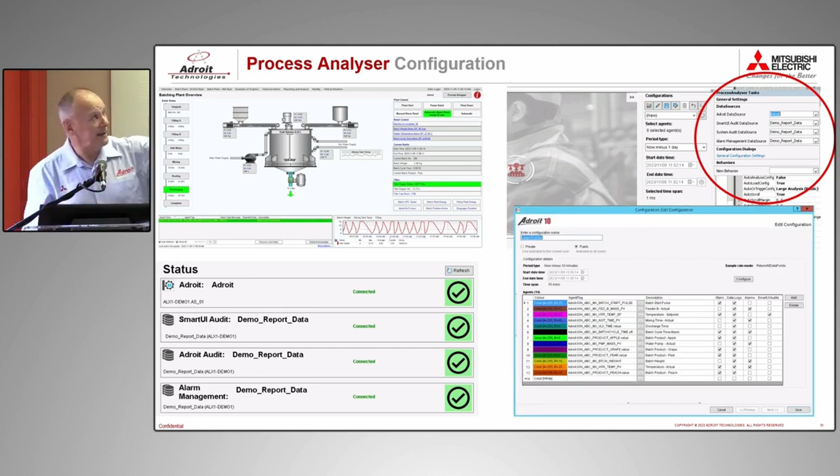So basically you've got your SCADA system, you literally drop the control down, you make sure you've got the connections to the databases there. Once you've got all the connections nicely organized, you then look at your process and you configure a data set that you're interested in. So you say, right, for this batching plant, I'm interested in the values that get put in, the temperatures, the process values, and the status of various pumps. These are the things I'm interested in.

And when you run the analysis on it, it goes and finds the log data for all those tags. It looks at the alarm data for those tags, any events that happened around those tags. So for example, if you've changed the heater set point, it will log that, and then it'll show you someone changed the heater set point at that point in time, and then you can see the effect on the process.

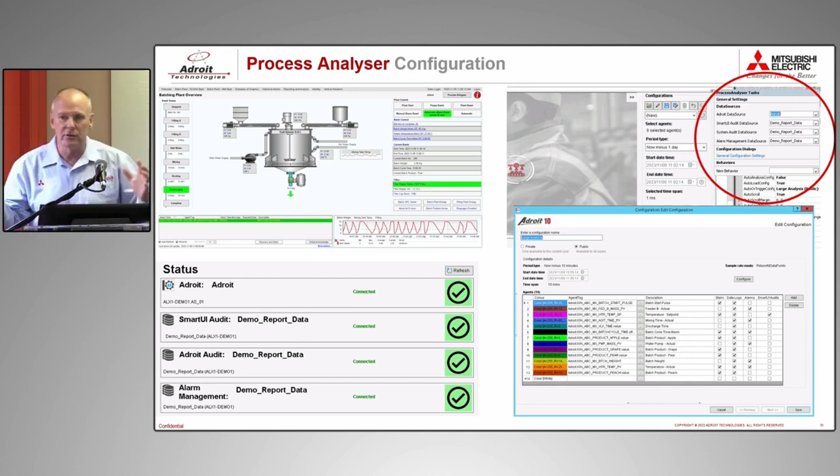And you can build these as various sets of interest for your process guy, your mechanical guy, your electrical guy. He can build his own set of values that he wants to analyze, and then use the tool to do that. And what it does, it brings into a single user interface the log data.

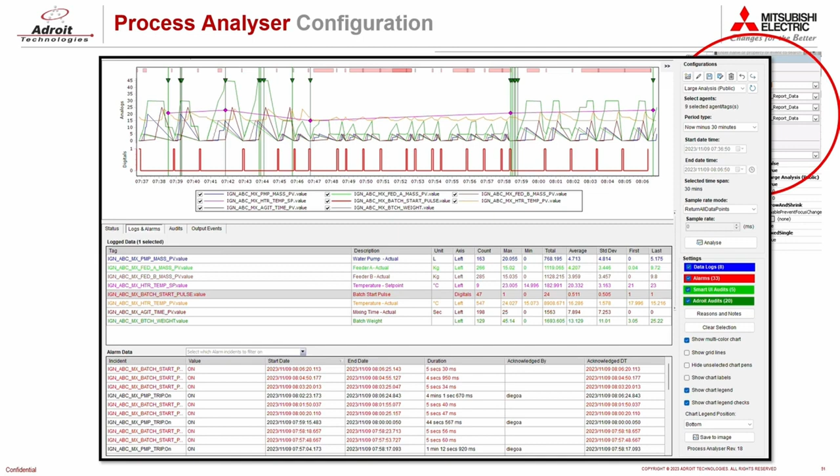So it amalgamates the log data, the event data when things happened in time, with alarm data at the top there, so you can see when things went into alarm, with digital data for status down here. So a motor turned on then, an alarm turned on then, the process is running then, etc. And then you can filter out things very quickly to try and understand and hone in on what the problem is.

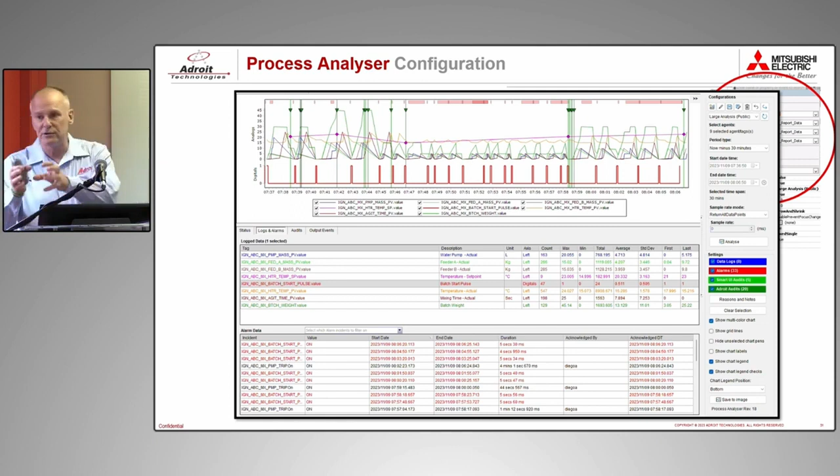The next level, of course, we were talking about this last week, is we've got this data, how do we apply machine learning and AI to this thing to literally be running these things proactively and maybe prompting users with areas to go and look. So what happened at that point in time? What was going on around it?

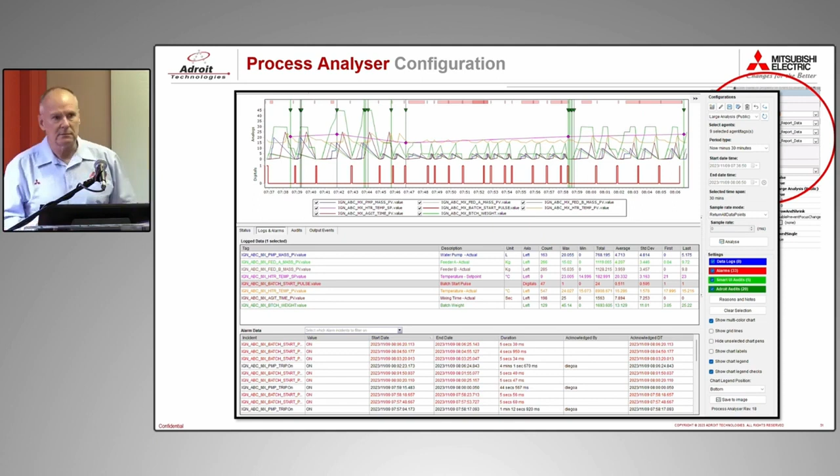Well, Jason always runs the plant when it fails. I'm not saying that.

So I thought we'd show it to you. It is a work in progress. Diego's doing enormous amounts of work around it. It's a very complex piece of software. So I have to say that he's been very patient with John and I, because we know what we want, and we're like, oh, why doesn't it work like this? Oh, that's not so easy to do.

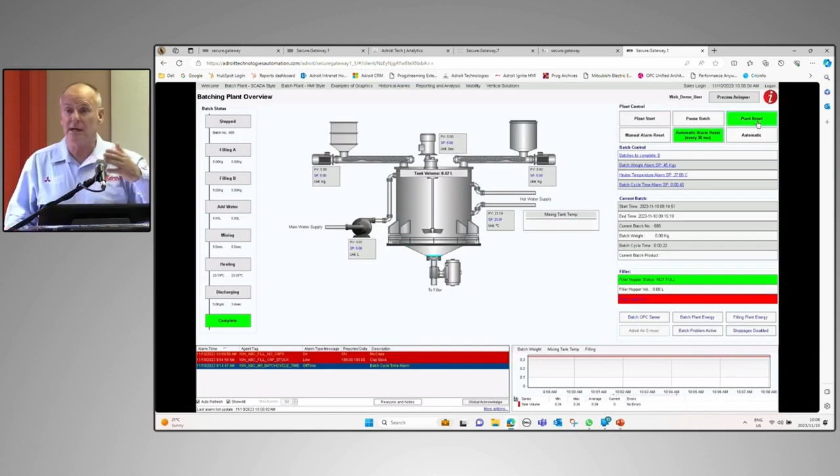But what you're seeing here is our demo on our website. So for SIs and other customers who want to go and show their customers, you can go and run this batch plant off the website as it stands right now. And it gives you a really good understanding of the capability of Adroit, the graphic capability. So this is running in our secure mobile gateway off our demo.

You just have to register and you can run it. So you can go and do demos to customers. And we're adding more and more to this in order to enable you to demonstrate stuff to customers. Our sales guys, for example, you can enable Adroit Air on here, because they obviously registered. If they want to go and show customers, they can go to a customer site, literally create alarms, they can show the stuff working. Otherwise, you're always kind of not being able to show it. And if you're interested in that and you want to go and show customers, talk to us. We just add you to the project.

So John, this is just a simple batching plant. It has 2 ingredients, some water. It stirs it for a time, and it heats it up. So very simple process, and discharges it. Oh, you haven't been running it?

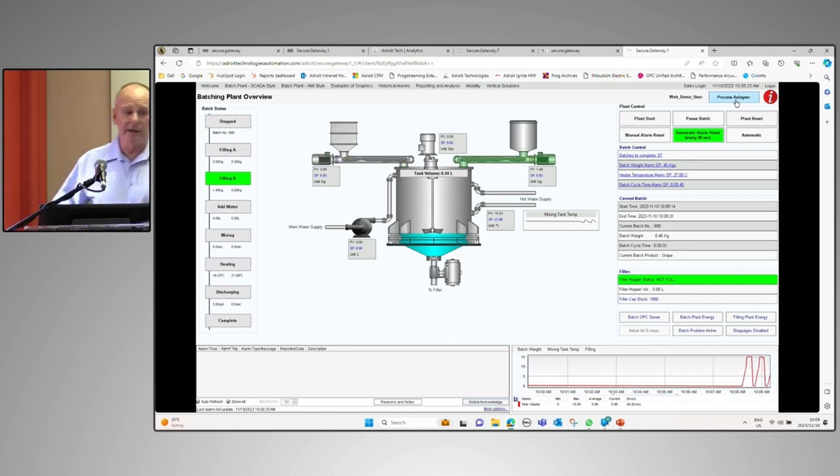Okay. Sorry? You can pull some historical data. Okay, let's go and do some historical data. So it runs 4 ingredients: peach, pear, grape, and apple, in random sequences. And we've injected a problem into the process. Normally you get alarms, because we also use this for our training, for our alarm management software. So we create alarms in order to analyze them.

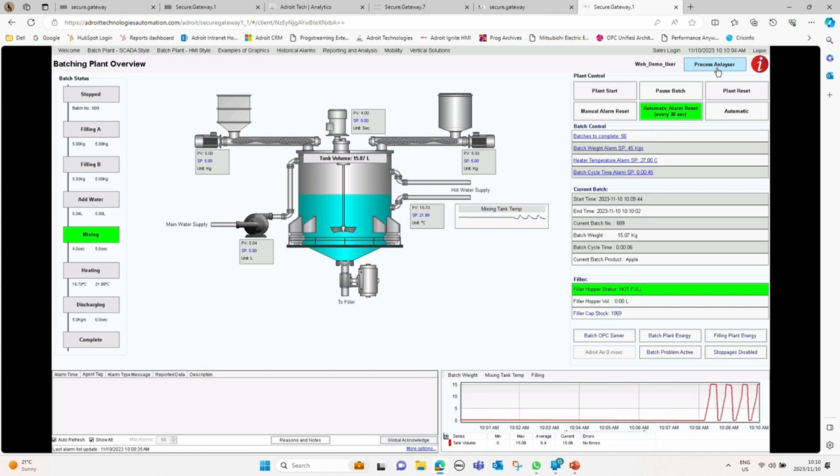But you can see what's happening at the bottom. This is the batch weight, and you can see that's fairly consistent. It fills, it stays stationary while it mixes and heats, and then it discharges. So you can see this graph at the bottom here. But again, you have no context. Your operators are just running this automatically. It's mixing different products, batching them, pushing them out into the filling plant, and off you go.

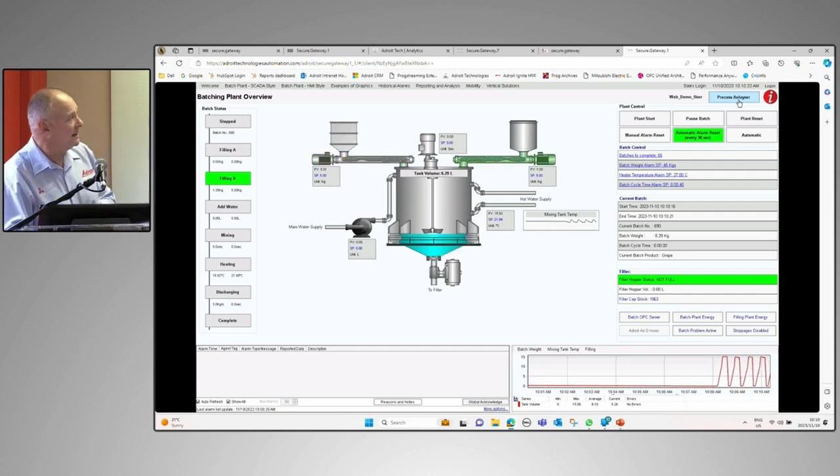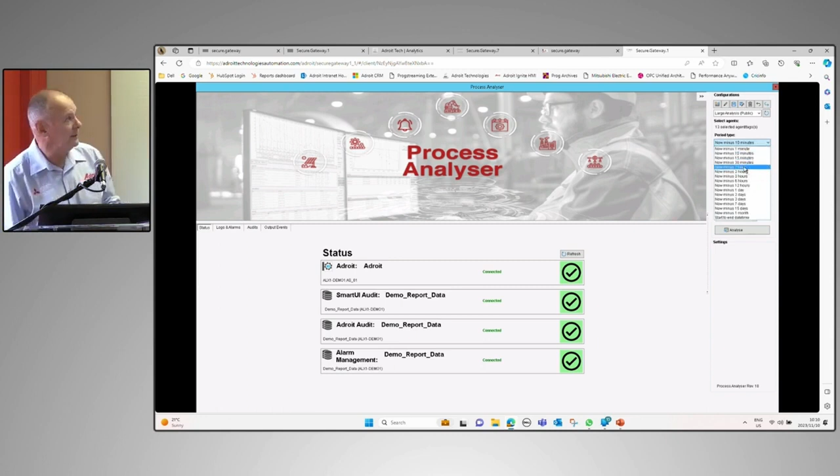Okay, so John, we don't know when the problem's coming, so we'll just go to some history. So we just click on Process Analyser. We've got it installed here. You'll see that it defaults. We've created a log set based on those variables inside the batching plant. You can see that I'm healthy with all my connections here. And John's just going to analyze the last probably 30 minutes, or I don't know how long you've had data for. Okay, we'll try an hour.

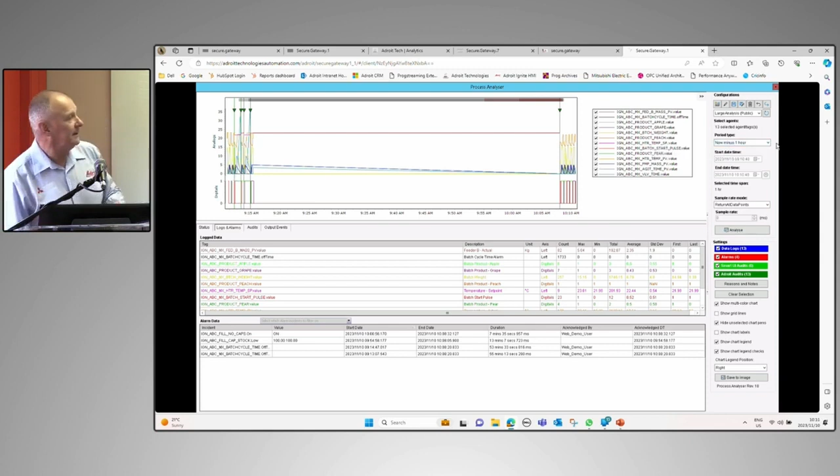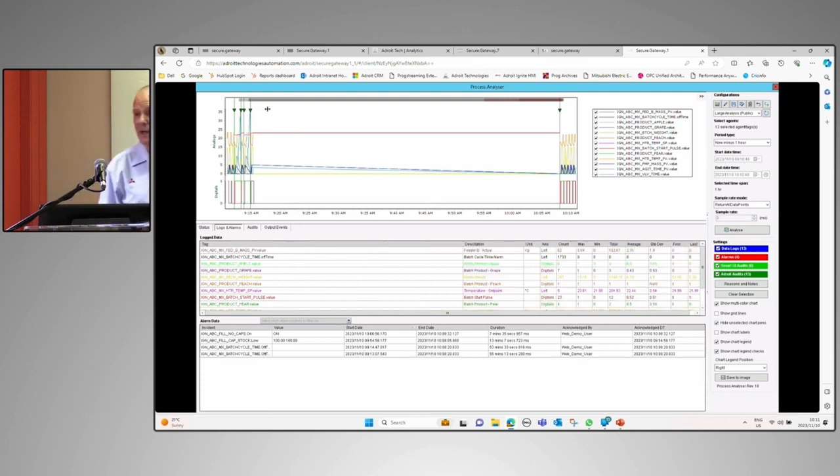Okay, so you can see we didn't run the process for a long time. But the point being, this is the logic we're trying to sell here. We get batch cycle time alarms, but we're not getting discharge alarms. Why are we getting batch cycle time alarms? John, do you want to zoom in? It's not ideal.

You have to press. Sorry, lots is going on. We didn't remember to run. We were supposed to be running this while we were talking. Maybe you go back, John, even.

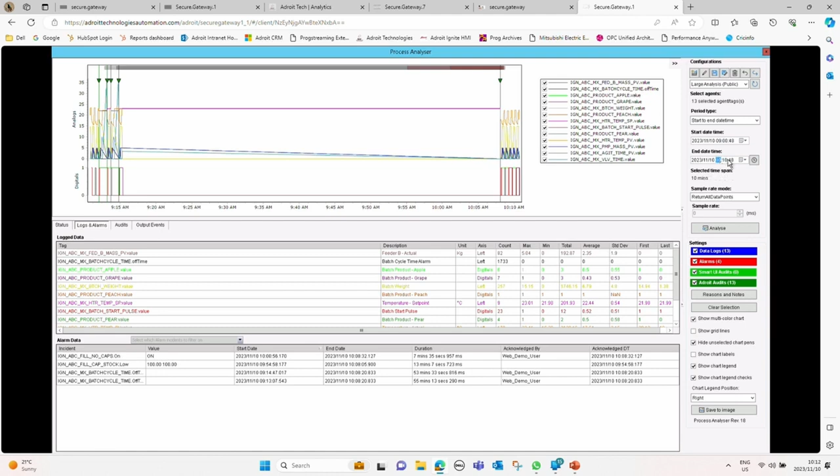And then you can filter by selecting what you want to see, data logs or no data logs. So, maybe go from 8 to 9. What we're going to show you is a typical situation: you have KPI monitoring and you're supposed to be running 14 or 16 batches an hour. Suddenly you're not making those. Why aren't I making those? And you'll see very quickly, there we go, thanks John.

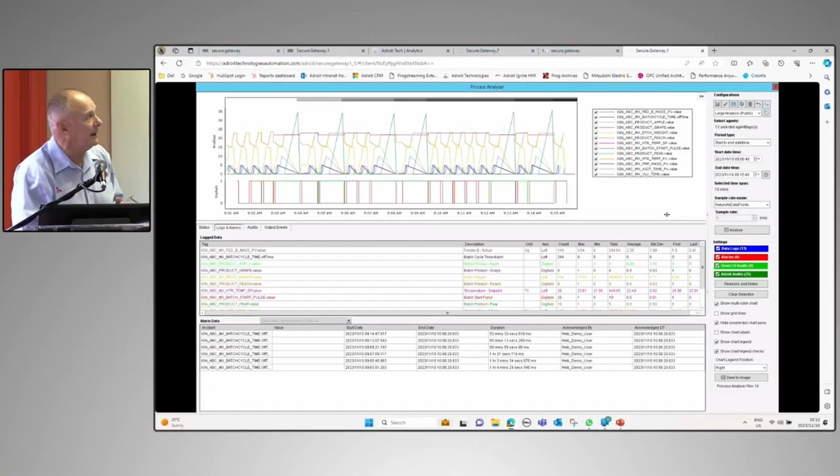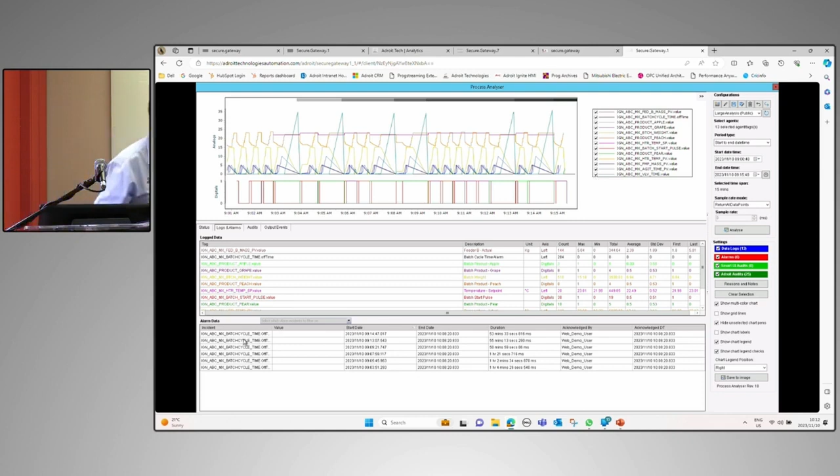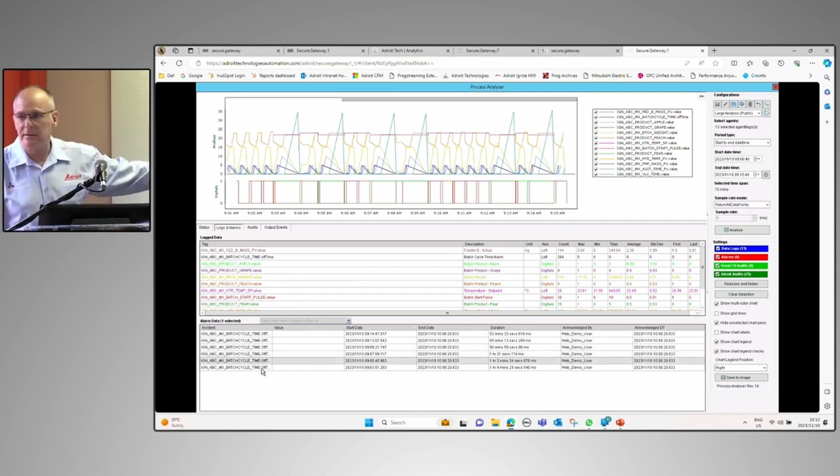So normally you would go to the process trends. What is the spiky one, John? Discharge. Okay, so you can see suddenly the discharge time is spiking, and you wonder, what's happening there? You can also see that we get a batch cycle time alarm. You can click on there and it'll highlight where you've got it. It's happened every single time after one of those batches has run. So now you start thinking, what's going on here?

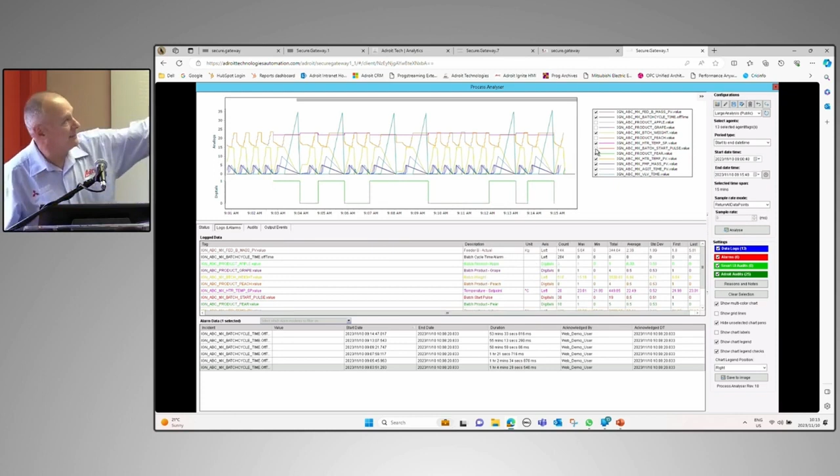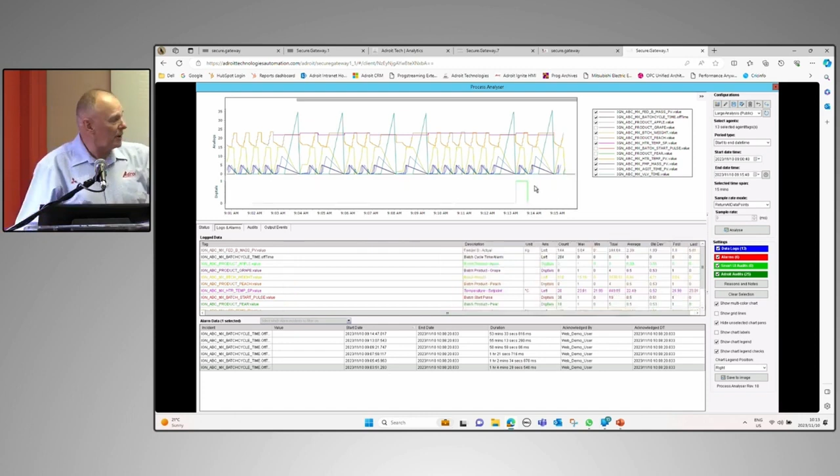At the bottom here, we're showing when we're running each product. So typically you would ask, is it a product problem? You can start switching off various trends, and you'll very quickly see that in fact it's pear. When I'm running pear, I'm getting the problem, not when I'm running apple or peach. It happens every single time. So why am I getting a discharge alarm? There must be something wrong with the product.

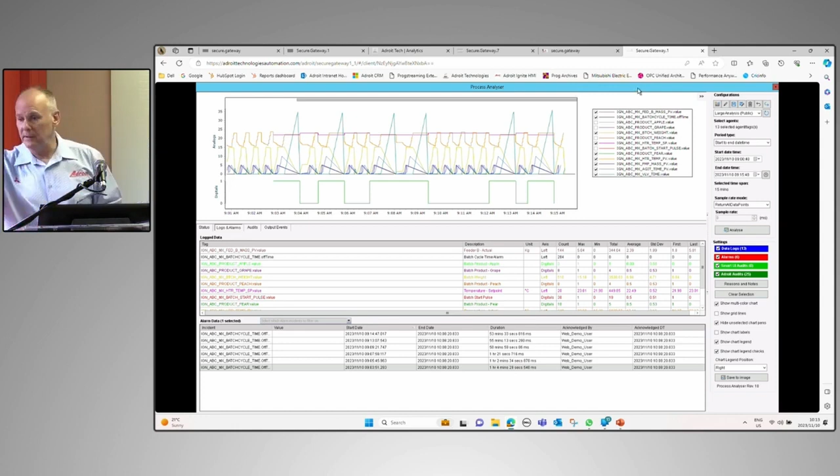And typically that's when you would identify the problem, bring in the process guys, ask what happened, and in this scenario, all we have to do is heat up the temperature another 3 degrees, and suddenly this goes away. It was something with the ingredients, and if John now changed the heating cycle up to 26, you would see that it will run through and show you that those problems go away. So it's a comprehensive view.

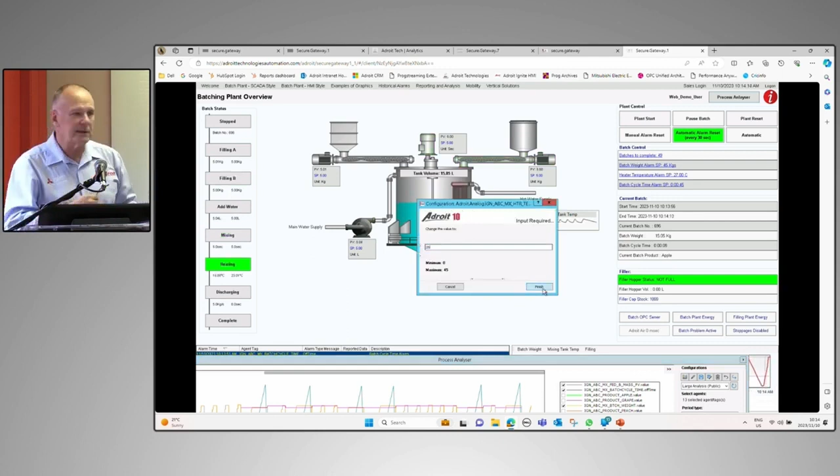If you go back to the Process Analyser, John. You can click through, this gives you the trends and the alarms. The next tab gives you the audits. So did you change the temperature, John? You can see in here that the admin changed the temperature set point. So it gives you an idea that when I change the set point, that's when you influence the process itself.

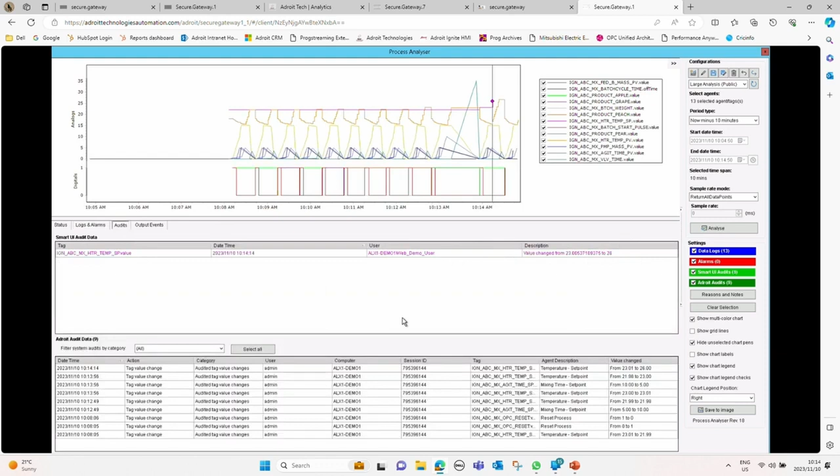Okay, cool. That's fine. And if you run it now, you'll see that we won't have that problem. So you can see here the smart UI audit. Someone in the operator changed the heater set point at that time, and they changed it from 23 to 28 to 26. And then you'll see, in fact, the process has gone away. And that's when you would adjust your recipe or whatever you need to do to bring the process in line.

So again, I think you can do lots with this. You can see the reasons and the notes in the database. You can show the chart labels. There's lots of stuff you can do. And you can save it to an image. So when you found a problem, you can just click Save to Image, take that, send it to your boss and say, listen, I think I found this problem.

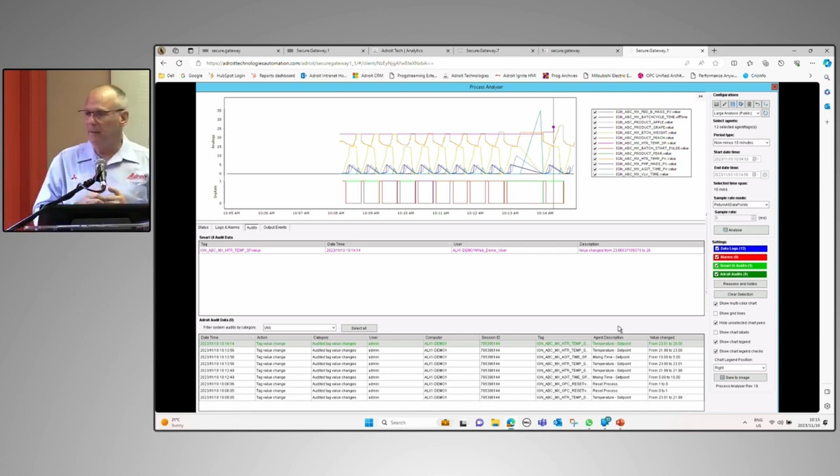It's taking shape. We're going to run it on some customers, some real challenges, and let's see how they use it. And I think the most exciting thing is this next level where we apply some AI to this data in this context to try and find those sorts of problems without the guy even doing this analysis, because it's all sitting here. And how do we do that?

Not my problem. Yeah. Apparently it's my problem. What do you think? Interesting.

It's available now. If you want to go and play it and put it on your customer sites, I would say give us another month or so when we sort of round it around. But it will be available soon, and we are targeting Adroit 11 for next year for full release of this, and we'll just see where we go from there.

Right, last little push before we hit a comfort break. So we've showed you a little bit about what the potential in the world is. We've showed you what we're doing in Adroit, where we're going with Adroit 11, all focused on trying to leverage this thing called the cloud and the tools available in the cloud.

We have, in the last 2 years, started a division called Digital Services. It's a spin-off out of our support department, and that's to focus our efforts on delivering digital transformation for customers. A lot of customers in the automation industry still lag a little bit behind. So we're there to say, guys, we understand our technology, we can take this journey with you. And that is headed up by Hugo Pinar, who is with Johan.

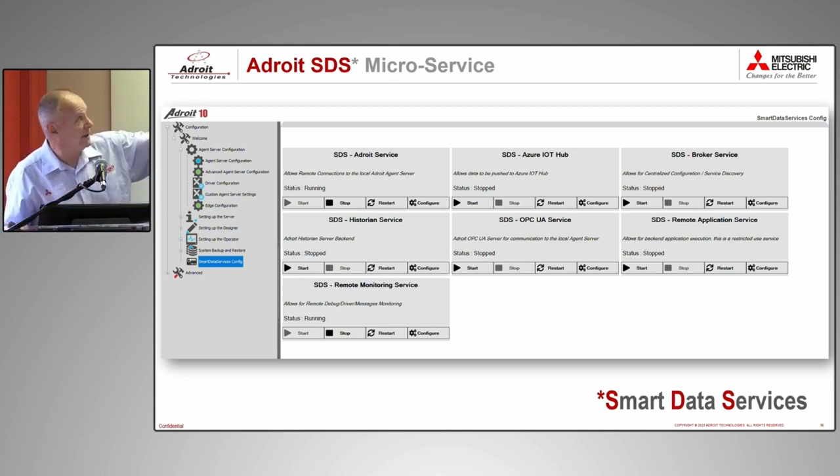This is the beginning of the UI in terms of setting up those services. Again, a lot of this work's been done in conjunction between Jay and the digital services guy, where you'll say, literally, I want to go to Azure IoT Hub. You'll configure that, and you'll say, I want to configure that device and that tag into that endpoint. So you'll be able to send data into different systems that can consume that data, literally by configuration, by point and click.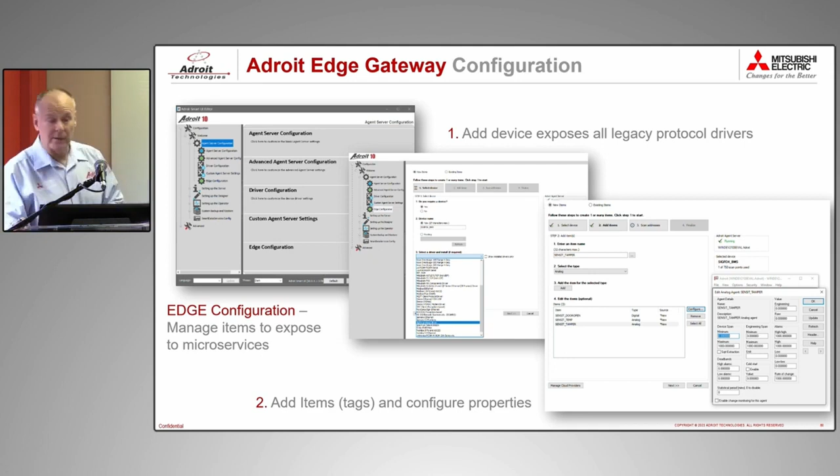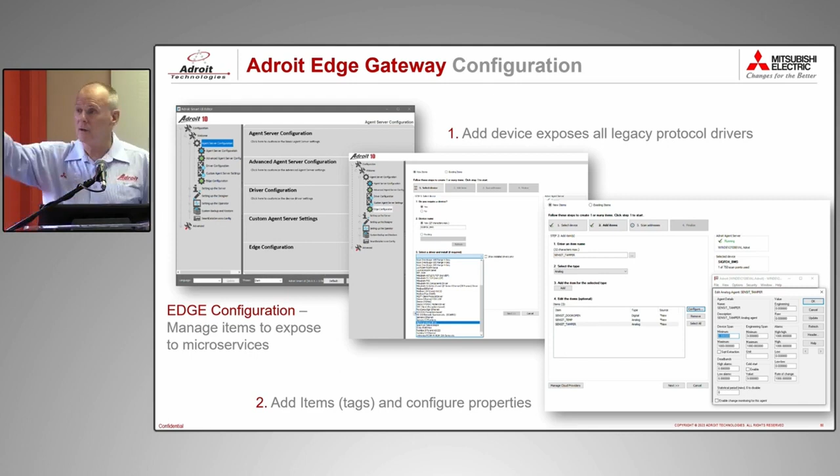And whether it's our infrastructure, we are busy setting up our own infrastructure. So literally next year, you'll say, I want to put all these trends and these motors and these statuses, and I'll select Adroit, which you'll pay us on a yearly basis, set it up, go into our cloud, and we will give you the tools to visualize that data in the cloud.

You set up your cloud provider, you route your endpoint, you'll see the data coming in. This is typically what you are looking at in the cloud. This is the ingestion point. There's a lot that goes on behind the scenes to make it look easy. Building these things is quite complex. It's not as trivial and easy as you think.

But the basic stuff we will supply off the shelf will be things like time series, to be able to put a motor status on, for example, and see how many times that's turned on, turned off, and get some basic reporting going. So literally off the shelf, available anywhere in a browser. In this case, we have partnered with a company called OQLIS. It's a crowd that's 10 years old, based out of Centurion. Lovely guys. I was at the launch of their new version last night, and very smart. So these are the visualization tools on top of the data that we'll be sending into the cloud as part of our standard offering.

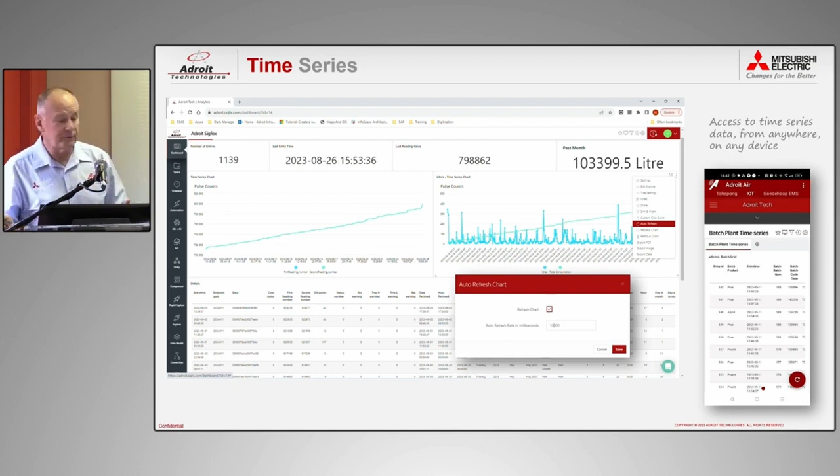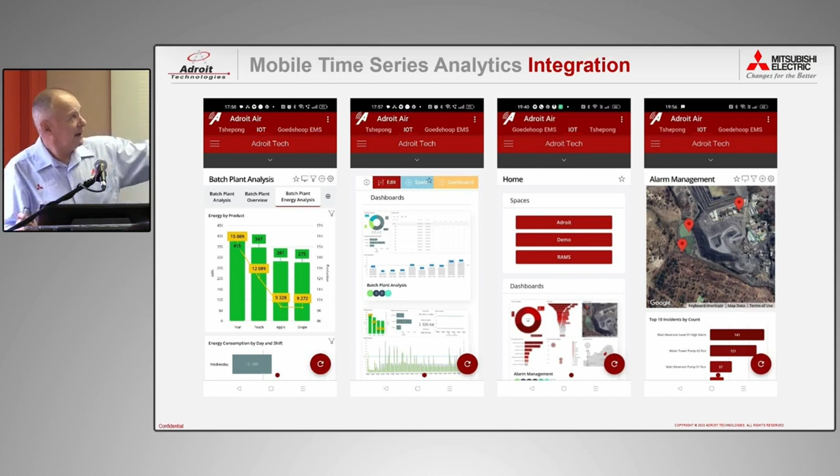These are just some of the things we've done, even on mobile, to prove some points. You can see production reports. We can build more comprehensive reports ourselves, and we will be teaching our partners to do that. These are all standard dashboards, and we're going to demonstrate right now that it's actually working, and then we're going to take a break. So please be a bit patient. These are some dashboards we've built off the standard web demo of the batching plant. We'll show you how that works now.

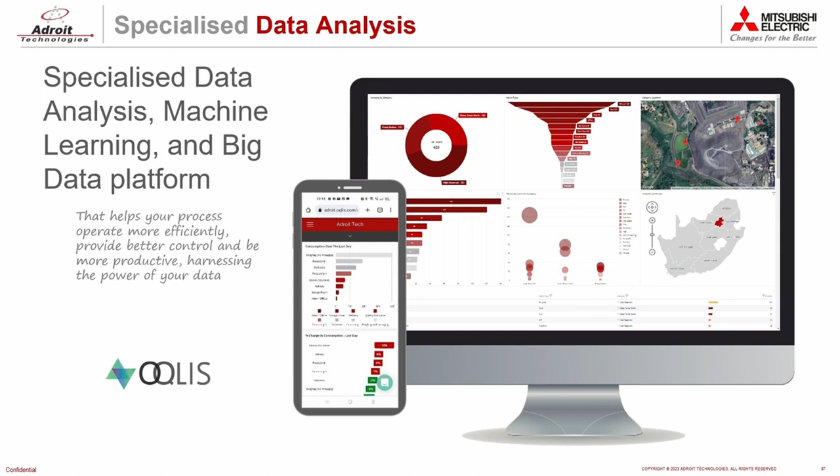We can do modeling. Alvin spoke about the modeling. We're starting to understand the AI world, the modeling world, and some customers are asking us to help them from that perspective. And then we can do some advanced analytics. So we've got that capability. And just before we stop, John is going to launch our demo.

This is the dashboard that we've got in the cloud using OQLIS. It shows you the product that you've made. They've got a really sexy front end to present data. You can see this shows you on a daily basis what you've manufactured. That's the real-time data. This is a representation of bottles that are bottled. And if John runs the demo, you'll see that.

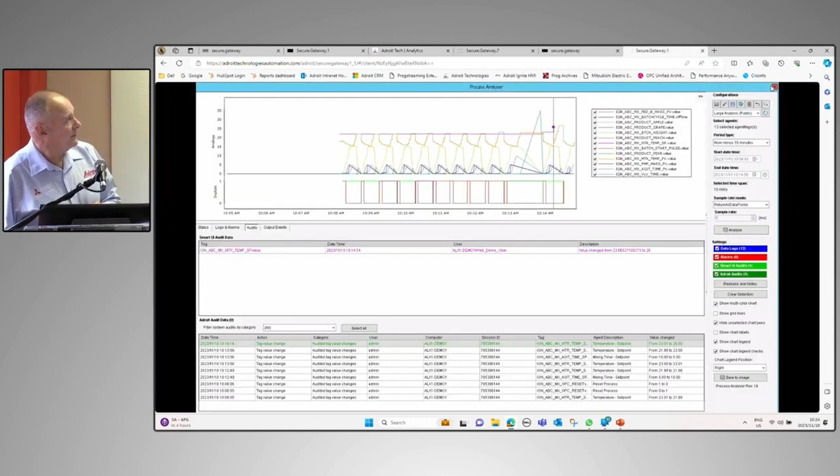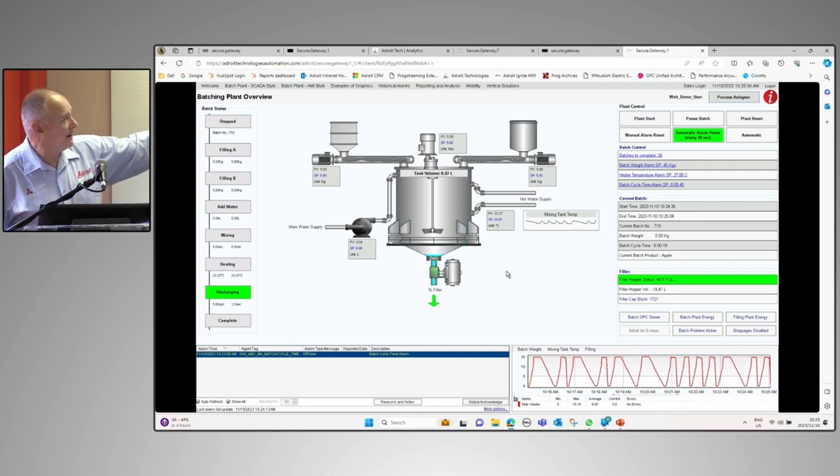So if you run the plant, we are batching. You can see that we are batching now. We'll just complete one. I think we're also filling. So there we complete the batch, and then we start the batch again. It just cycles through this. And if you refresh that, John? So it's now 271. At the end of that batch, we're using our Edge gateway, pushing the data into the cloud, and we are reporting off this.

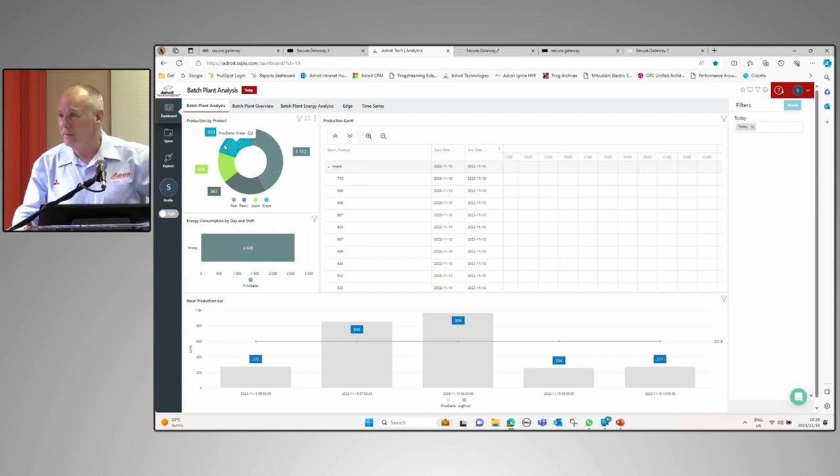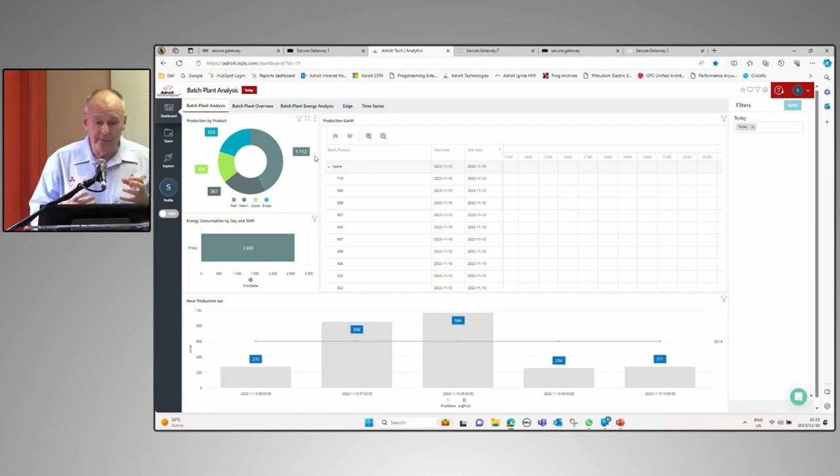Typically, this is not real time. These are for dashboards, so you're refreshing these every couple of minutes, and you can see it. We went to 271, but it's pretty instantaneous. You saw how quick that MQTT was. The dashboards and the analytics you can get from this are actually quite remarkable in terms of the ML and the modeling, which we can offer services around.